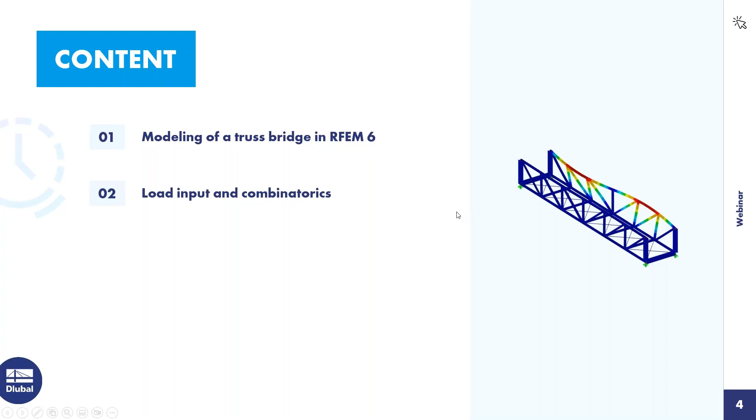The other way is to watch the entire webinar and then email your questions to info@dlubal.com. For the agenda today, Oliver starts with the modeling of that truss bridge. Then he will input loads and do the combinatorics. Then follows the determination of buckling lengths with an eigenvalue analysis using the structure stability add-on. And then the last point is the design according to Eurocode 3 with the steel design add-on.

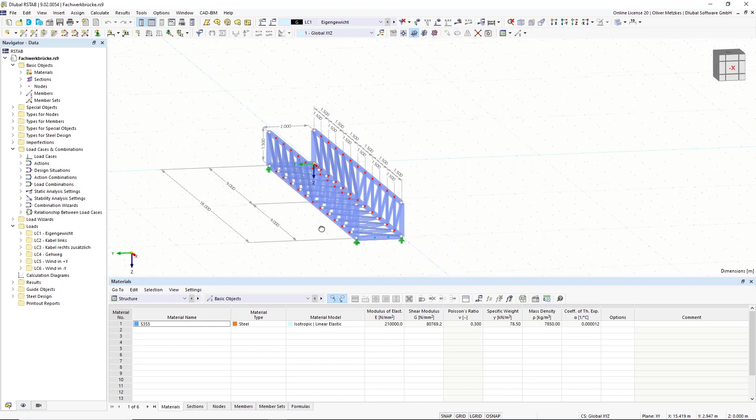Okay, sorry. I shortly want to show the structure that we want to model and analyze today. It's a truss bridge, used for example in industrial structures for cables, pipes, or also for walkways. The interesting topic here is the determination of the buckling length of the top chord, because there's no lateral connection at the top. So we want to analyze this using the structural stability add-on.

Okay, so we want to start with a new file. Let's create a new one using the symbol for the new model, and call it truss bridge. I want to directly also activate the add-ons that we want to use, which we can find here in the add-ons tab. As I've said, we want to use the structure stability add-on and also the steel design add-on.

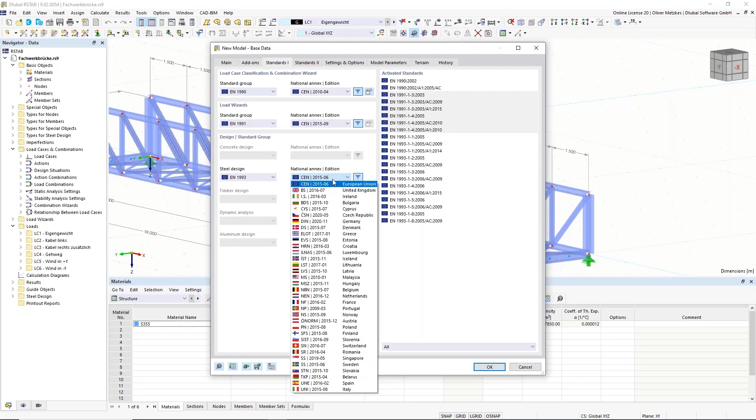Also, the next tab is interesting because we can directly define the standards that we want to use. So we want to use steel design according to Eurocode 3 today, so Eurocode 3 needs to be activated here. Then we can also choose the national annex, which is later important for partial safety factors and other values in the design. For now, I want to use the European recommendation for this webinar today.

Okay, I have set my add-ons and also my standards, and then I can begin with the structure. At first, I want to start by defining all the materials and all the sections that I want to use. I could also do it during modeling, but today I want to show how we can first define all the sections and use them later in the modeling.

So I want to start with a very empty file, so I will delete all the materials and sections that have been created automatically, just by right-clicking on the entry in the data navigator and deleting all the materials and all the sections. If we now want to start creating sections, we can do so by right-clicking on sections and on new section, and then this new section dialog opens.

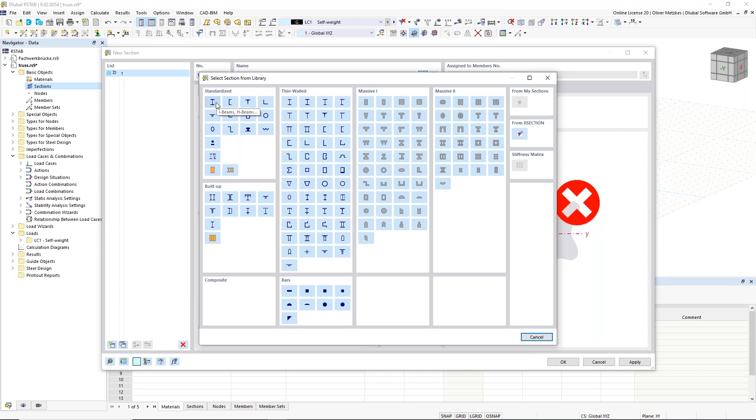There we have in the title the option to use the section library to import our sections. I click on that symbol, and we see in the section library lots of shapes and different types: standardized sections, thin wall sections, and also some shapes for massive sections. Today we want to use standardized sections. The top chord, for example, and also the bottom chord should be HEB sections, so I will first go to this I-section button here.

In the list, we can see all the possible I sections from different standards, including American and European standards. At first it's a very huge list, but to find your section, you can use this filter function. For example, for the region, we can input European Union, and now the list is shorter.

Now it's easier to find the corresponding section that we want to use. For example, here the HEB section, and it should be HEB 140 in our example.

Then we also have to choose a material. It's on the right lower corner, create a new material, and also here we have this button for the material library. It works a bit similar to the section library. By default, if there's no filter active, I will deactivate this one. Then you also have this huge list with all material types, steel, timber, and so on. But by using the filters, for example, for region or material type, you can easily find the material you are looking for.

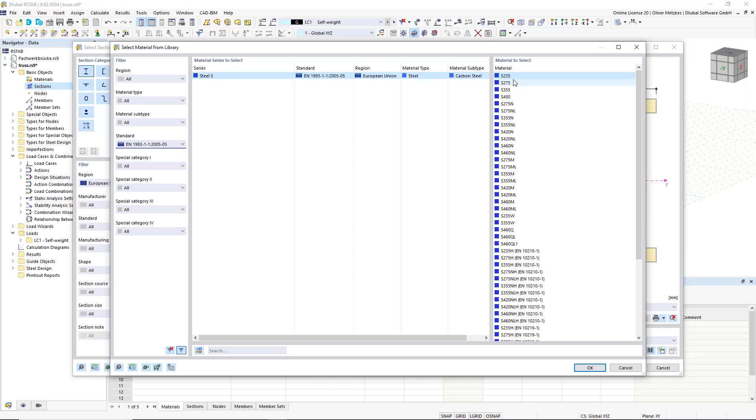In my case, I want the steel material, and I know it's defined in Eurocode 3. So I can directly go here in the list for EN 1993 and find my steel material. I want to use the steel S355, so I can select it here.

By clicking OK, this section is created. So I have my first section, HEB 140, and I can easily find it later. I can also add a comment, so let's say that is the section I want to use for the chords of my truss bridge.

The next section I want to create is now for the verticals, the vertical members. I can go again into the section library, and it should now be an HEA section. So let's go again to the I sections. And if I want to avoid always having to open this list, now I want to have those sections here.

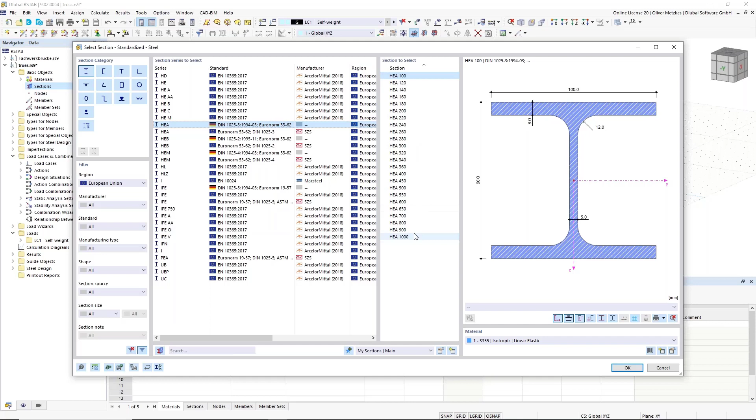I can also add them to my favorites. For example, if I often have to use HEB, HEA, IPE sections, I can add them to my favorite list so that I don't have to use this big section library every time. So I select all those sections by pressing Shift, and with this button I can add them to the favorites, my sections.

I will click this, and now I can also use this library, but by clicking on My Sections, I'm directly in those sections that I have saved here. So I can easily choose now this HEA section here, and that would be the section for my verticals.

I want to create a new section, but it would be the same one, so I just copy it here by clicking this copy button. Now for diagonals.

The next section I want to create is for my cross beams. I create a new one, and now instead of going into the section library or my sections, I can also directly type in the section name. If I type in a section name that is recognized in the database, it will automatically create the section. For example, now I want to use an IPE 100, so I can directly enter IPE 100 and it will choose the first corresponding shape.

So now I have created this IPE 100 for the cross beams, and I can also add a comment here. I would need two more sections: one now for my tension members, which would be an L shape. So I will go into the angles and look for a corresponding one. I want a small one, so let's just use this section here.

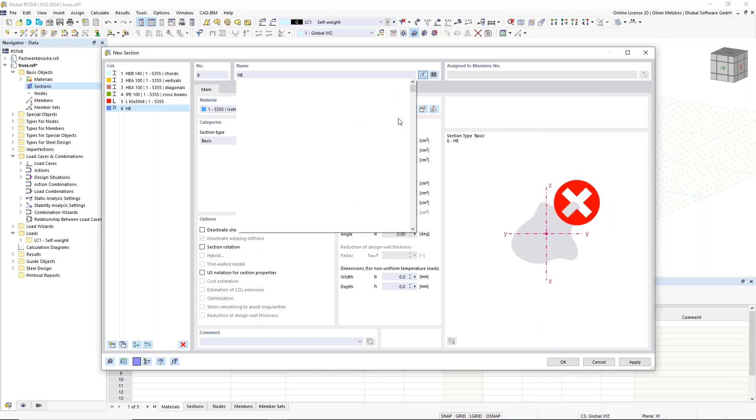The last section we want to create is for the end frames. We will have end frames at the beginning and the end of the structure, and now we want to use HEB 200 sections. So I directly type them in, and it's automatically recognized, and we have created this section. I just add the comment for the end frames.

Good, so now we have created materials and sections using the section library or direct input. So now we have all our sections and we can begin with the modeling.

The first thing we want to look at is the definition of the grid in the background, because we can use these points also for modeling. As we know, the structure we want to model has a span of 18 meters, with the middle at 9 meters, and verticals every 1.5 meters. So it would be good to have our grid in the background also with a distance of 1.5 meters, and a line, for example, after 9 meters. So we can also define that.

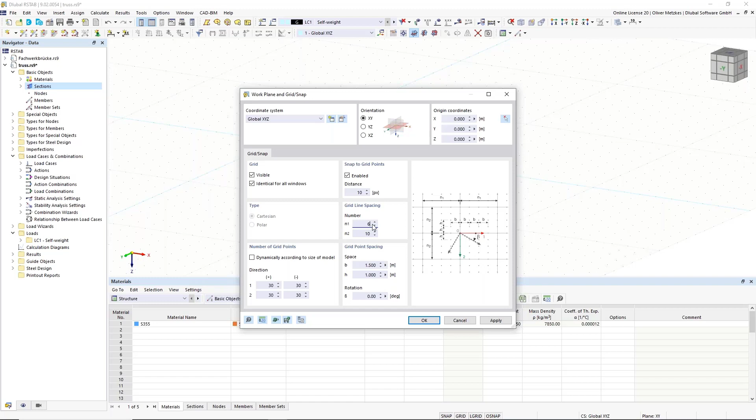I will go back to the model we are creating, and we can use this symbol here for the definition and settings of the line grid and the work plane. This is called the work plane with all the grid points, and here we can also define the distances between the grid points. As I said, we want to use 1.5 meters and we want a grid line every 6 points, so that would be in the middle after 9 meters, and also at the end.

Okay, now it's automatically adapted and we can use those points for modeling. So to create the first chord, we go here on this button, new single member, and here we can choose the member type. It would be a beam member type, and also the section - automatically the first section of the list is chosen, so that's okay for the chords: HEB 140. We simply click OK, and then we can model it graphically.

So we start here at point 0, and then we use this grid point here after 2 lines, and we see already at the cursor the info says it's 18 meters - exactly the length we want to have. I click here again, and now we have already modeled our first chord member.

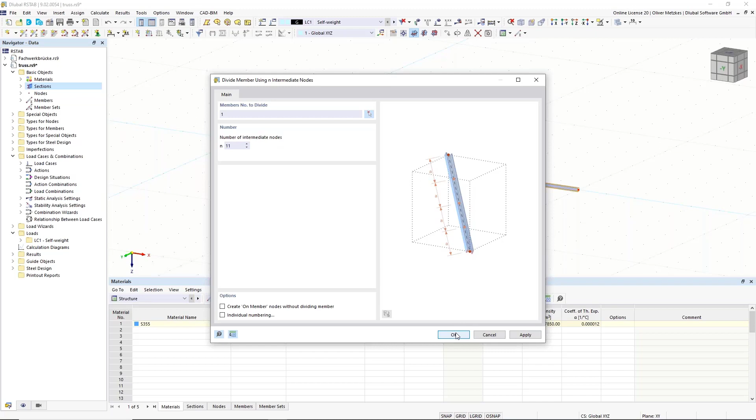Now I want to also have these vertical members. For that, I can use the division function for this member. I right click on the member, then go into divide member and n intermediate nodes. In this case, I want to have 12 sections, so I would need 11 intermediate nodes. I put in 11 nodes and click OK, and now those 11 nodes are created, every 1.5 meters. We can also hover over the members, and the info tells us the length is exactly 1.5 meters.

Now that I have created these division nodes, I can use the copy function to create the second chord member and also all the vertical beams. I will select all those members and then use the copy function - you can find it here, the move/copy function. I click on this button, and we want to create a copy of this member in the negative Z direction, 1.5 meters.

If we go now under the options tab, we can use the function of step links. If you click on that, it means automatically all the nodes created are now linked with a member, and for that member we can choose a template. I will create a new member template - it should not be a beam member, but truss members for the verticals and diagonals. The truss member type means automatically at the beginning and end of the member a hinge is created, so bending moments are not transmitted at the member ends. That's basically what I want for truss members - the general assumption that I have hinges at all the nodes. So I use the truss member type here, and as a section I use the section for the vertical members.

I say OK, and now if I also confirm this move/copy function, my chord member is copied 1.5 meters, and in between, all the vertical members are also automatically created.

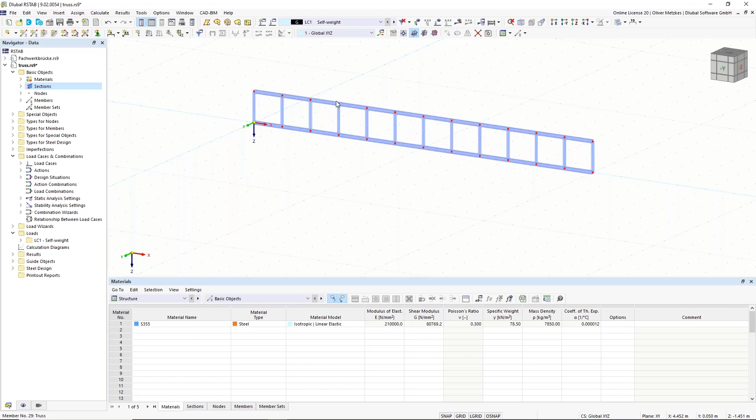Now I would also need the diagonal members, and I want to create them so that they mostly get tension - starting at the upper point and going to the right lower point. I create a new member using this new member function. Again it should be a truss member, so I select the truss member type, and as a section I use the section for the diagonals.

Okay, and now I can click at the two nodes to create this member. So now, for example, I could also use again those move copy functions here to create the other members, or another method would be to use the drag and drop function.

So I can simply pick this member and move it around by holding my left mouse button. And if I press the control key, additionally, you see there's a little plus symbol. And if I then go to the next node and release the mouse button, then it's automatically copied. And I can do that not only with one member, but also with multiple members.

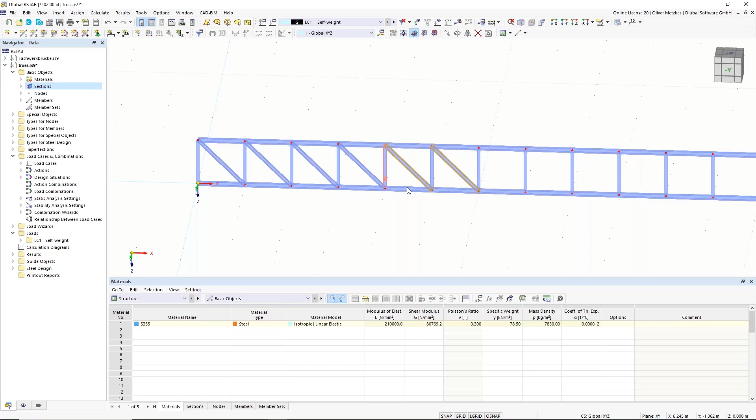So I can also copy those two members. And if I copy them again, I've already modeled half of the diagonals. So now, as the half structure is done, I can also select all those diagonals and just mirror them to the other side.

So I use the mirror function here at the top, this button, and I want to create a copy, and I have to specify the mirroring plane. It would be the YZ plane, and the middle point would be one point here in the middle. Okay, I confirm it, and then all the other diagonals are created.

Okay, good. So already I have half of my structure here. And now I want to copy it again to have the second half, and I will do it again by using drag and drop, because I know that the grid points in this direction are spaced every 1 meter.

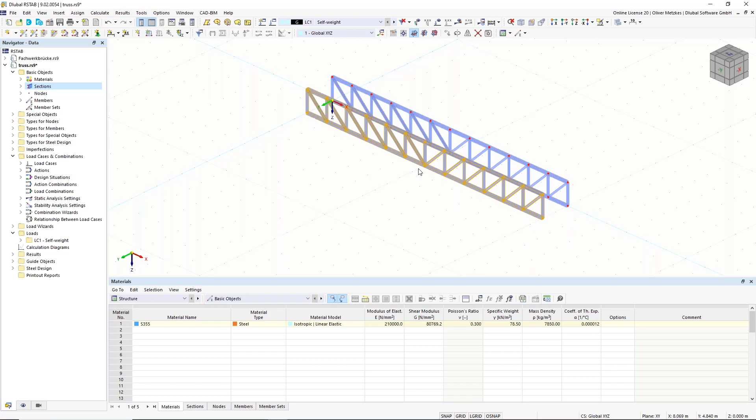So as I want to have 2 meters of width, I can simply pick it again, use the second grid point here, and pressing Control key, then I can release it and it's copied again.

Okay, so now I have my two truss girders here, and I need now the modeling of the cross beams in between. So I will again choose this function for creating a new member.

I will leave the member type as beam, but for the cross beams, I also want to use member hinges at start and end. So the other way of using truss members, for example, would be to use beam members, but using member hinges. I want to shortly show how that works.

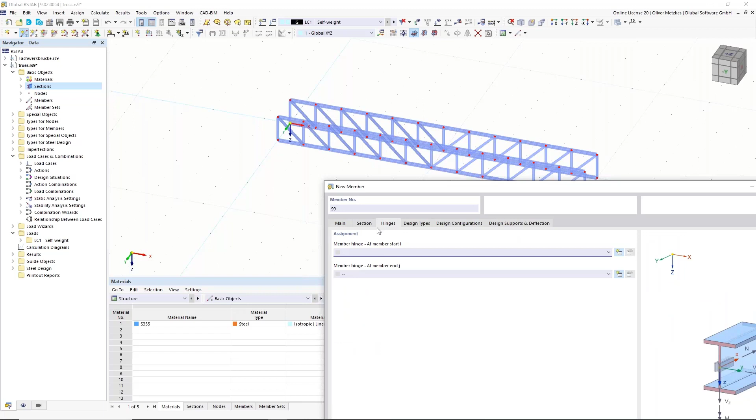So I have to activate the hinges function, and then there's this tab for the hinges, and I can create new member hinges that I will use at the beginning and at the end of the members. So now I want to create a new one by clicking this button.

And now for the member hinges, it is like that everything that is activated, that will be released. So now it's the bending moment in Y and Z direction, so exactly what I want. So I can directly confirm this default input. And I want to have it at the member start and also at the member end.

So, okay, I have to choose the correct section, I see. So this is still the first section, but I want to have the section for the cross beams, so the IPE sections. I confirm it, and now I can model here this beam by picking the two nodes.

Okay, now I have created one, and I would have to copy it here 11 times so that I have 11 cross beams, and I can use again the copy function for that. But now saying that I don't want to have one step, but I want to have 10 steps.

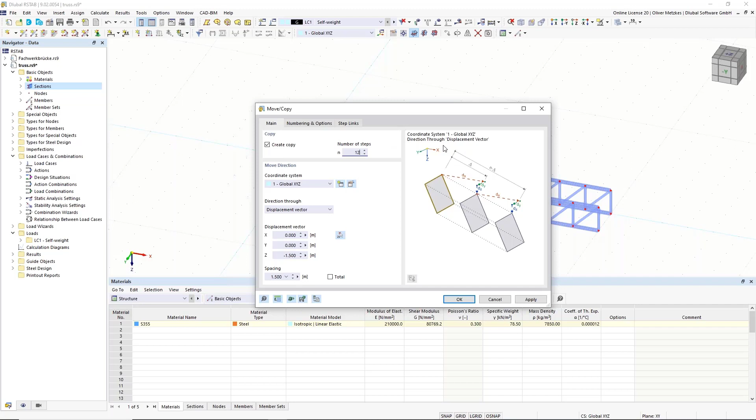10, sorry. And for the displacement vector, I could also put it in directly, so in the X direction, it would be 1.5 meters. But another option would be to use this picking function to pick the distance and the displacement vector directly from the model. I will show that.

So I use this function, and I want to say this member should be copied from here to here, so the 1.5 meters in the X direction. In the options, I will deactivate this linking function and confirm it. And then all my cross beams are created because it's copied here 10 times.

Okay, so now I also have the cross beams created. And what is missing now is here the end frame that needs to be at the beginning and the end of my truss bridge. So I want to have another member in between here. It should be a beam member without hinges. And as sections, I want to use now the section for the end frames.

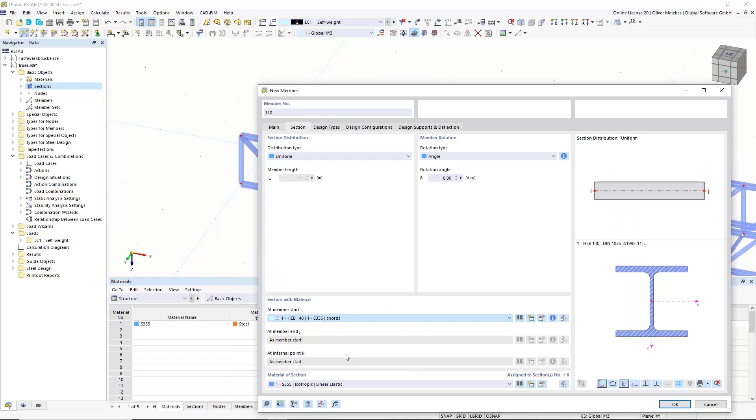Okay, so from this point to that point, we have already seen this function. Now also those two members that have been created automatically, I want to modify them, and also at the other edge, I can do it simultaneously. So I select all 4 members by pressing the Control key.

I can edit them by right-clicking and choosing Edit Members. So now I can say it's no longer a member type truss, but I want to have it as a beam, and the section should also be the one for the end frames. As I want to use the strong axis in the direction of this frame, I can choose the rotation angle to be 90 degrees. Okay, so now it's rotated and the section is changed.

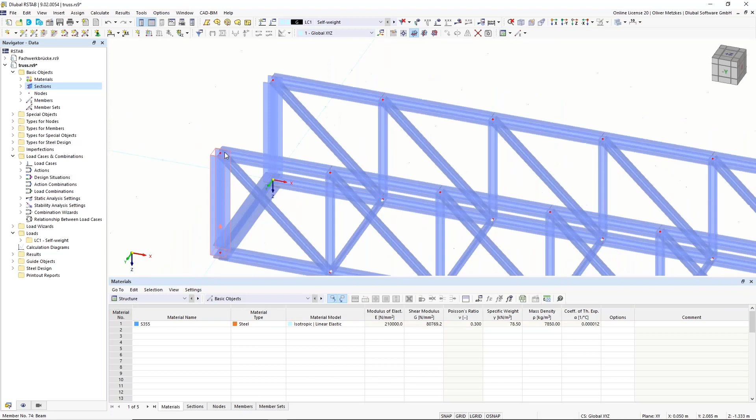I also did it here at the other side, and I simply need to copy this member again by using drag and drop in this case. Okay, so I have created all the members of the truss bridge, and I see only the tension members in between are missing.

So I also create them again using the create member function. Now I want to choose the member type tension member, so if it would get compression during the calculation, then it's removed, and the next iteration will begin without this member - it will fail in compression. That is the tension member type. I choose the section for the tension members, and I create those two members here.

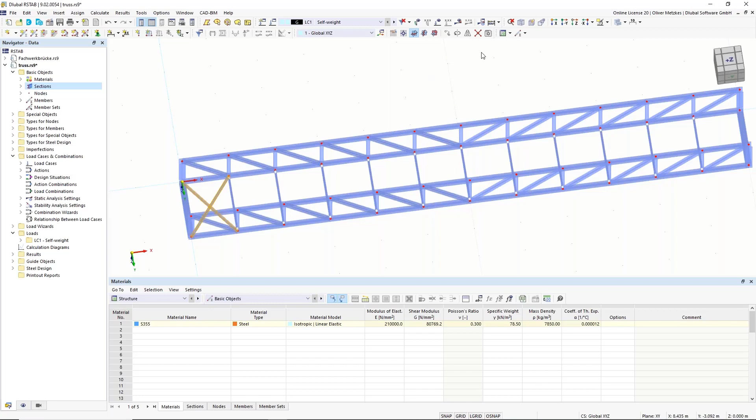And I can copy them again using the move copy function 11 times in the X direction. Oh, that was just one time. Okay, I have removed this number, so now it's 10 times, I think. Yeah, okay, so now I have also created all the tension members.

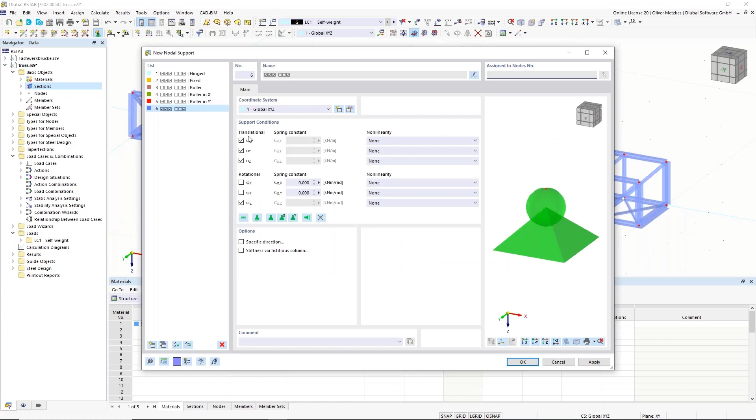Fine, so basically the structure is created. I now just need some nodal supports. So I want to create supports here at these 4 nodes, using nodal support for that. There's the button here at the top, and I will create the nodal supports type. If I create a new nodal support type, then every checkbox that is active will be supported. So for the first node here, I want to support all translational directions, X, Y, and Z direction. Okay, and I confirm this choice and click on this node, and then the nodal support will be placed.

Okay, I will create a new one for this node. So now I only want the Z and the X direction supported. So I activate that, okay, for this node.

And then for the other side, I also want to have nodal supports, so I create new ones. Now it should not be supported in the X direction, so only Z direction and Y direction. So I choose only those two - that would be the support type for this node. And the other node should be only in Z direction, so I will just create this.

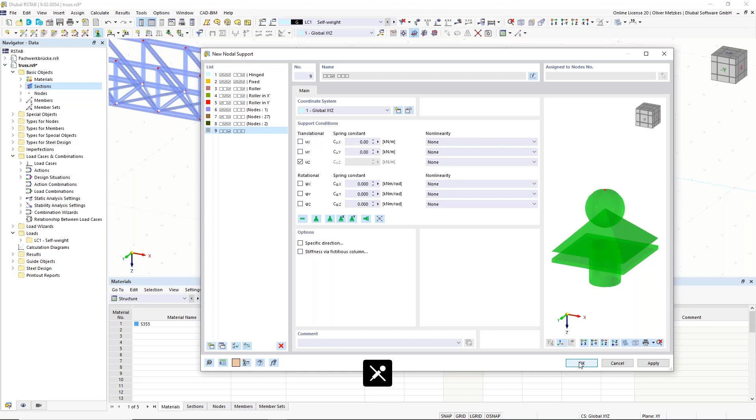Okay, so now we also have supports and the structure is modeled. So I can simply save it, for example, and it's always a good idea. If you save it the first time, then you also have to specify where you want to save it. So I just save it here in my default folder. Okay, and then when the structure is saved, we don't have this little star here anymore, because that star tells you that something has been modified after saving.

Okay, now we have modeled our structure and we want to begin by creating the load cases and also the loads. If you want to go into the load case menu, you can do so here by clicking this button, that would edit one load case, and you are in this dialog for load cases and combinations.

Automatically, the first load case has been created, so it's the self-weight load case, and the self-weight of all the members is automatically taken into account by using the self-weight factor. So in the positive Z direction, as it goes downwards, you have this factor of 1.0, so the self-weight is considered within this load case number 1.

I also want to create other load cases. So in my example, I first want to create all the load cases, create all the combinations, and later I want to also insert the loadings. So first we want to go through this dialog and create all load cases and combinations.

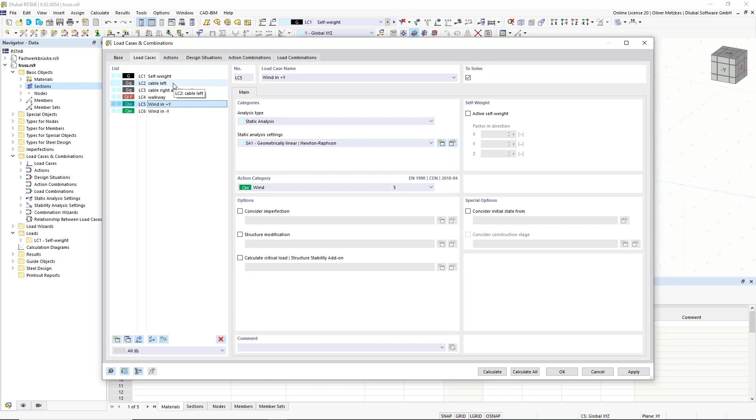I don't have temperature loads, to simplify things a bit, but in my structure, as I have modeled the supports this way, a temperature load would just increase the length, but there would be no internal force from that if I have this uniform temperature load, for example. So for now, I'd say it's okay to have this simple structure of load cases.

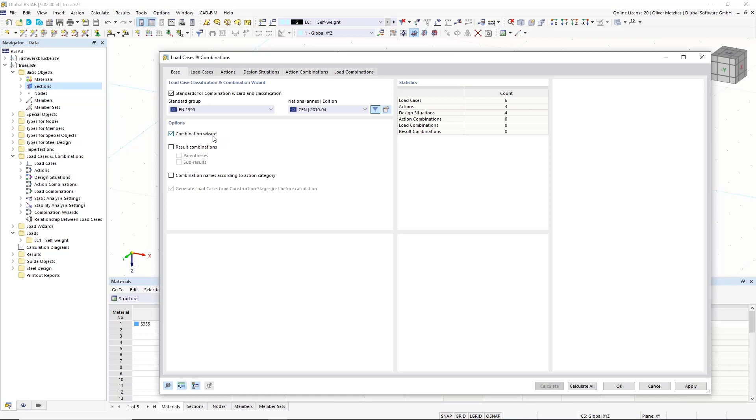We now want to perform the combinatorics by using this combination wizard. If you go into the base tab, you see I have the combination wizard active, which means I can create all the load combinations automatically.

If we want to do so, we can look at this actions tab, which now lists all our actions, and we can choose whether the load cases within one action category are acting simultaneously, or could act simultaneously, or are, for example, alternative.

For all the others we only have a few load cases. For this action category 2, we've said the two cable loads can also act simultaneously. But for the wind loads, as I have positive Y direction and negative Y direction, it would be an alternative loading, so I can choose that here.

What I can't choose here is that the load cases also have dependencies between the action categories. I wanted to say that the walkway can only be there if I don't have the cable loading at the right side, for example. That I can input in the next tab, the design situations.

In this list I now have all the different design situations I could analyze, and design situations are defined by the design situation type. As you can see, the first design situation for the ULS design also includes the formula using partial safety factors and combination values. You can see the combination rule if you click this little info button, and then you see what's inside this design situation type.

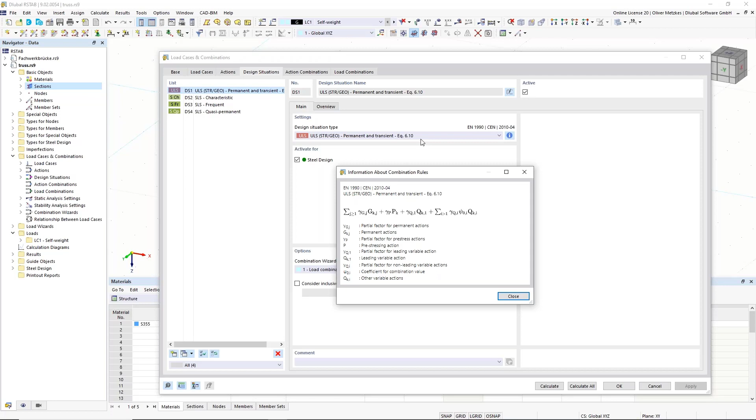In this example I only need ULS and SLS characteristics, so I can simply delete the other two types that were created automatically, and I will delete them. For the first design situation type, I now want to say that I have dependencies between the load cases, which can be done using this function for considering inclusive or exclusive load cases.

If I create a new relationship between the load cases, I can say, okay, my cable load on the right side, which I select here, can only be there if I already have cables on the left side, so only combine it with load case number 2. There shouldn't be a case where I have only load case 3, for example.

That was one of the dependencies I mentioned before that I want to apply in the structure. In the exclusive load cases, I can then say I should never combine the walkway load, load case number 4, with the cable load on the right side, because I've said they cannot act together — if there are cables, you can't walk, and if you're walking, there are no cables.

So that is the dependency that I want to put in here. That can be done by using this relationship between the load cases. So I have created this dependency, and now the other rules for combination are specified in the combination wizard here.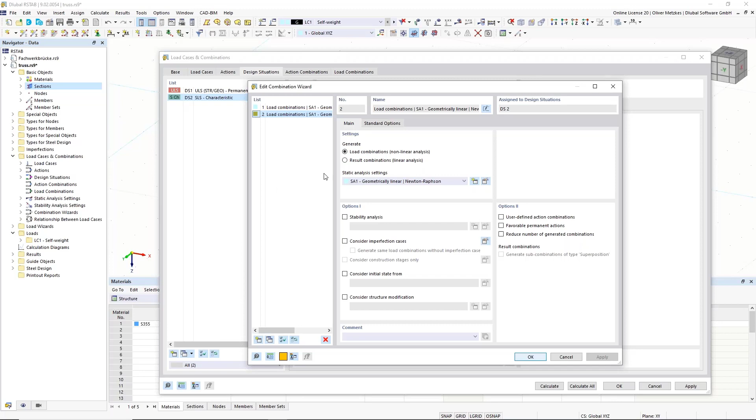For the SLS design situation, I use another combination wizard. I create a new one here, and in this one, I don't choose the stability analysis option because I only need it for my ULS configuration and not for the SLS design. So first order without stability analysis here. And I also want to consider these rules between the load cases, so I also activate this option here.

I can now click on the next tab, the action combinations, where I see all the different combinations between the actions, and resulting from that list the load combinations are created. If I click on the next tab, I see I have 19 possible combinations of loadings with the partial safety factors and combination values. For all those load combinations, the calculate critical load option is also active because I chose it in the combination wizard. For now, all those combinations are empty because I haven't defined the loadings.

So I will just go into my load case, and I will start with load case number 2. Now I want to define those cable loads. For that, I want to use the load wizard, specifically the member loads from area loads wizard.

For that I need some help nodes in my structure, because on the left side I only have this cable loading, and I use the member division function to create a new node on this member, defining the left side of my bridge. So I right click on those two members and use the divide member function, now with a distance, and I want to say from the member end, divide it at 40% of the member length.

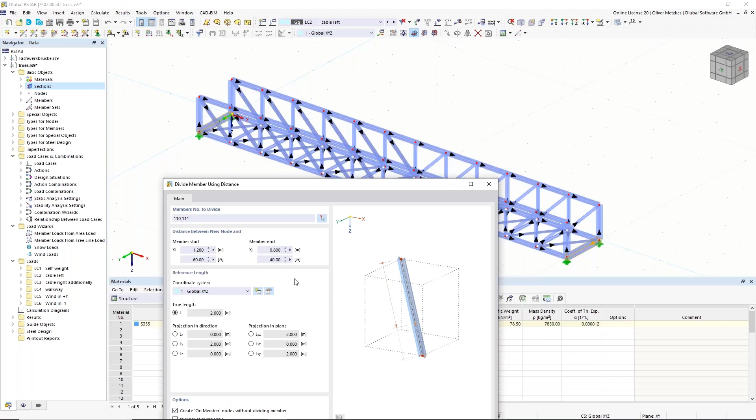I also want to activate this option, create on-member nodes without dividing the member, because I want to still consider this member as one member later for the design. It's only a help node that I want to place here, so I use this create on-member nodes function. Now the left side for the cables is specified by this node at 40%.

Now I can use this member load wizard, member loads from area loads. I right click on it and create a new load wizard, and in my example I want 1.5 kilonewton per square meter in the Z direction. For the geometry, I can select those nodes that I created, using this picking function to select the corner nodes of my surface load: this one, the help node, the other one, and that node. So I want to place a surface load on this plane.

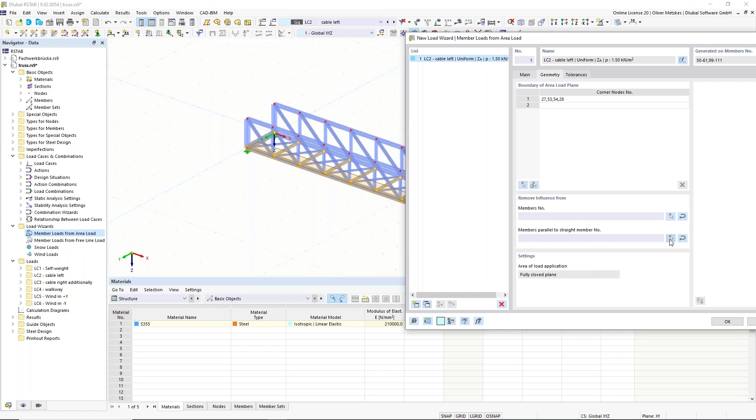In the background, you already see selected all the members that will be loaded. I see the load will be distributed to the cross beams, but also to the chords, and I want to remove the load from the chords - it should all be on the cross beams. So I use this function and select all members that are parallel to one of the chord members, and now we see only the cross beams will be loaded.

I confirm it, and now we see this load as a surface load, which we can also display separately. If we right click on it, we have this function display separately, and we see that from the surface load, automatically these member loads are created on the cross beams. We can again right click on it to see it as a surface load. That would be the load case for the cable load on the left side.

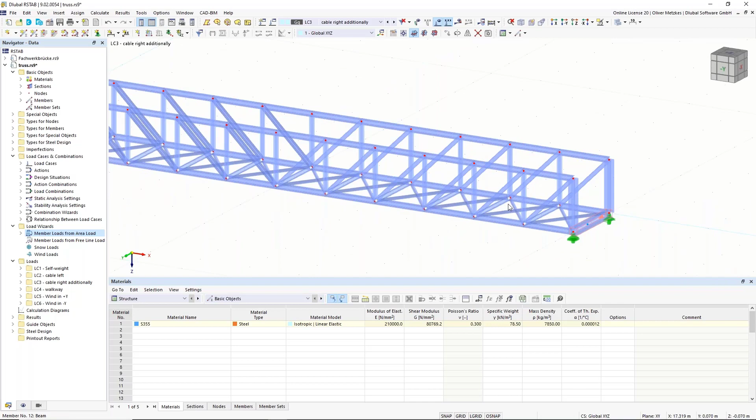For the right side, I want to use a different load wizard, but again with help nodes. So I will again divide those members: right click on it, divide member by a distance, and now it should be in the middle, 50% from the start, as on-member nodes.

Okay, now I want to show you another load wizard: the member loads from a free line load. So I want to assume there's a line load, and from that I want to create the member loads. For the cables on the right side, I create this new load wizard here.

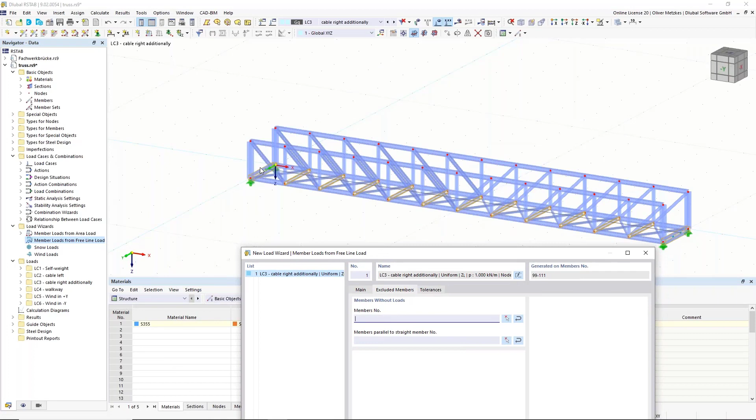Let's say we have 1 kilonewton per meter, and it should go from node to node. So I use this button here to select the 2 nodes - it should be this one and that one. Now we don't need to exclude any members, as only the cross beams will be loaded, so it would be okay now.

I confirm it directly, and you see I have placed this line load here. As it was for the surface loads, I can also right click on it and display it separately, and you see those point loads will be created from this load wizard. So it's just another load wizard that you can use.

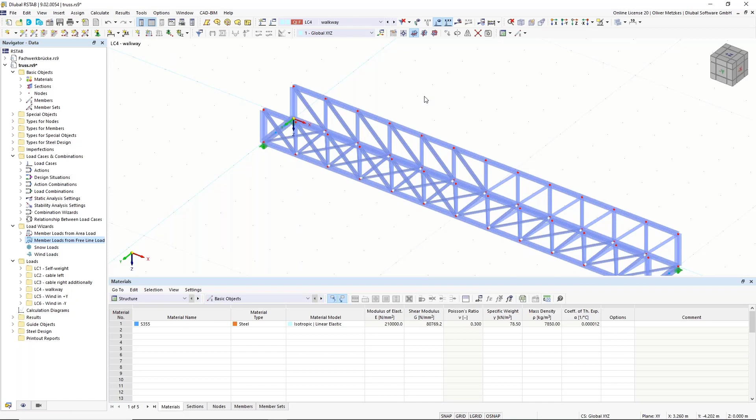I use it now for the cable load on the right side. For the walkway load, I will use again the member loads from area load, so I can create a new one. Now I want to have 3 kilonewton per square meter, and again I want to pick the nodes here - now the other side.

I click on all the nodes. Oh, I see I've not picked this one. Okay, now I have them. And remove the influence again from all the members that are parallel to this one.

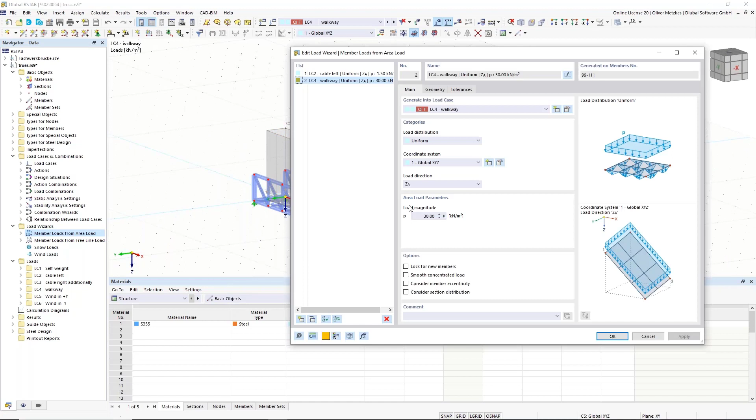Okay, I have here my surface load. Oh, it's 30 - I added it again because I wanted to have 3. Yeah, that is better. And I could also display it separately to check the load.

So now the missing load cases are the wind load cases. For the wind load here, I also want to use this member loads from area loads function. But as I have a structure with openings, I would also calculate the wind load value by using a fullness coefficient.

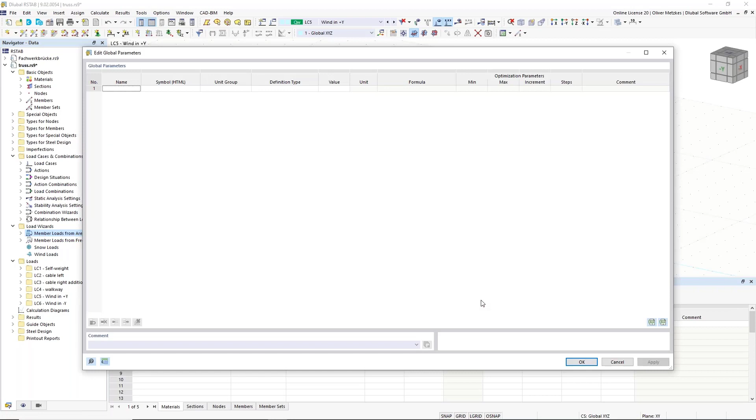So at first I will use the parameter function here. In the table for the structure, you have also this button to edit the global parameters, and then you can define parameters that you use in your model. Also for parameterization, for example of the height or the width, it would be possible. Now I only want to use it for the calculation of the wind load.

So let's say we have a wind pressure here, and we simply insert it here - it would be a load. So we have it here as a surface load, this 1 kilonewton per square meter. And for the wind zone that I'm in, I have here 0.4. I would also have to consider a force coefficient.

Because I have the section shapes here and a truss beam, that would be a coefficient. So I have it as - let's just use this partial factor because it would be the same from the units. Let's say it's 2 in this case, and the fullness coefficient, so we have phi. I will use again this partial factor type. Okay, and now let's say we have a fullness coefficient of 0.2.

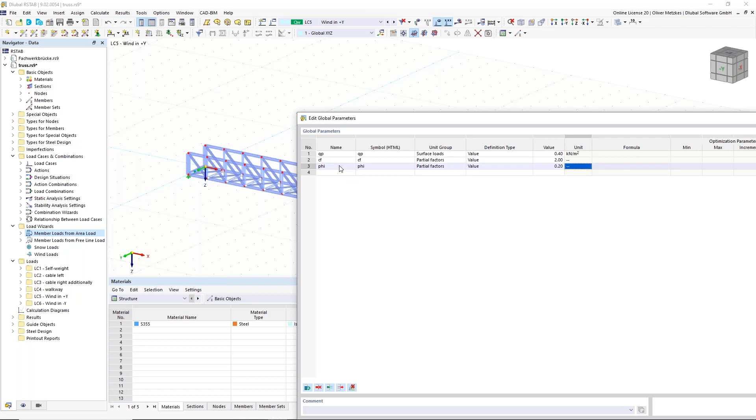Now, as we have defined all those values here in the global parameters dialog, we can also use them later in our model. So I've defined my parameters here. I confirm it, and now I can create the new load wizard.

So for the area loading, it would be now in the y direction, and the load magnitude I can calculate using the parameters. I click on this small button here on the right side and choose the edit formula option. Now I can say it would be QP times force coefficient times fullness coefficient. So that would be my value that I want to place on the surface, and it will also be distributed on each member.

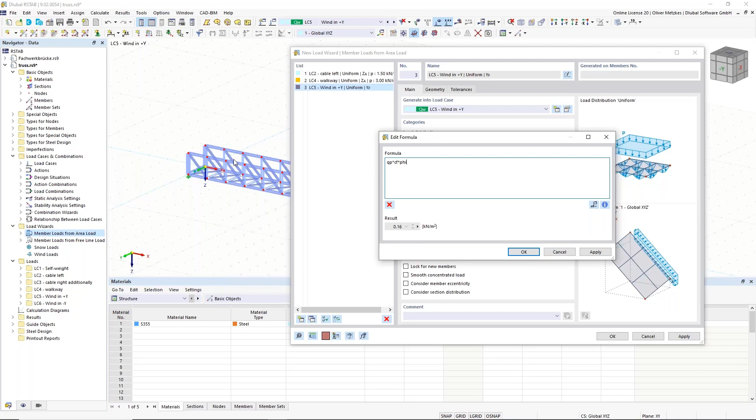Okay, so I use that here, and the geometry would now be this side. So I choose here the corner nodes, and I also say I have a second load plane on the other side. I don't want to consider the shading for simplifying the model, I just want to place the same loading on both sides. And I can confirm it.

So I want to have here my wind load on both sides, and I also want to have it in the next load case but in the opposite direction. So I can, for example, also copy the loading by going into the load case dialog and using this button at the bottom to add the loads from an existing load case to another one.

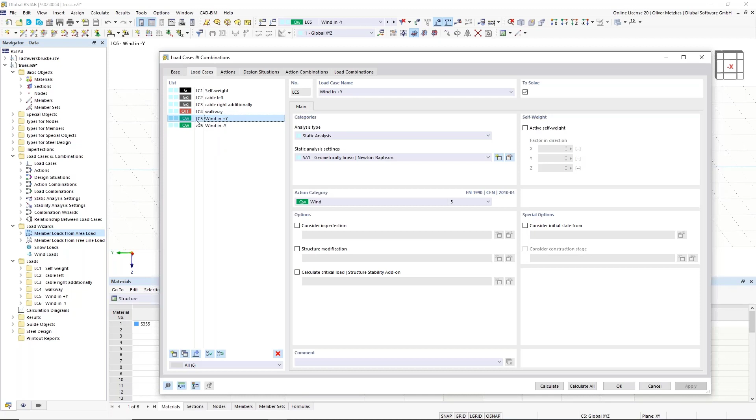So I go to load case number 5, use this button, and I want to copy the loads into the existing load case number 6. And now in load case number 6, I also have this loading, and I want to have it in the opposite direction. So I go inside and add the formula again by adding a minus. Okay, and now it's in the opposite direction.

Good, so now we have all our loadings inside, and all the combinations will already have the correct loading inside. And now we could, for example, calculate our design situation number 1, which includes all the results from all the load combinations.

As I have selected the stability analysis option, it performs first static analysis and then also stability analysis by using the internal forces from the static analysis as a basis. Okay, so now I have my results, and in this design situation number 1, there are all the results included.

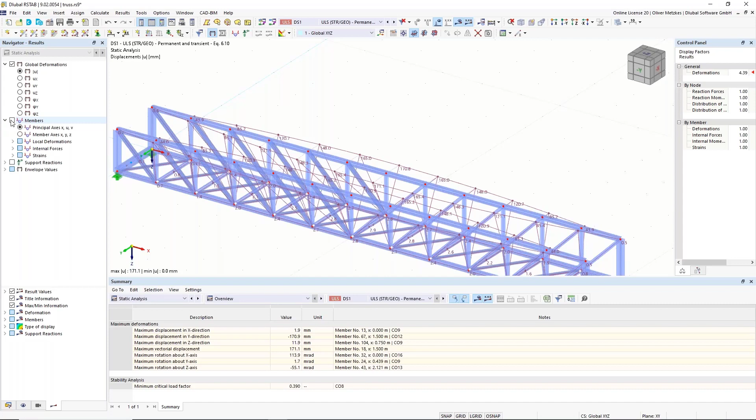So I can show max and min values. For example, if I go into this result navigator for the members, I can show internal forces, so normal force, and it would show max and min values here. To have it a bit more clear in the view, I don't want to show all the beams, but maybe just the chords.

So I can use visibility options. I select here my two top chords, for example, and then use this button to create a new visibility by the selected objects. Now I can see I only have these two chords in the view.

So I see, as here are max and min values, I will always have compression in these chords, well, as expected, as it's a simple beam as basic structure. So I have compression in the top chord, tension in the lower chord. Then I would also have tension in diagonals and compression in the verticals.

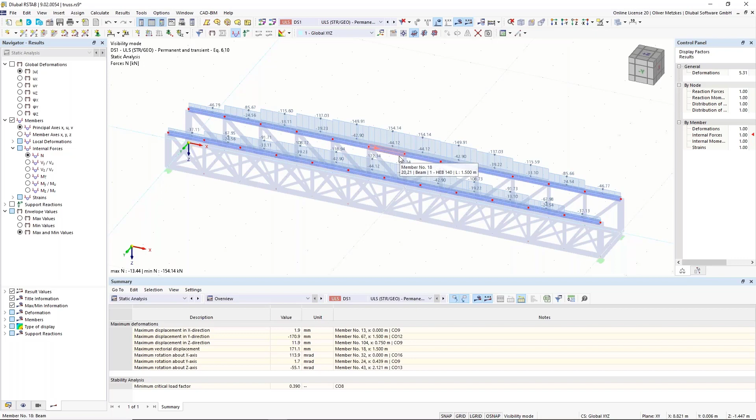The highest compression force here is 150 kilonewton, and it's a varying compression force, lower at the end and higher in the middle. Well, basically as I expected. And like that, I could also show all the different results, also deformations, for example. So that is this result navigator function here.

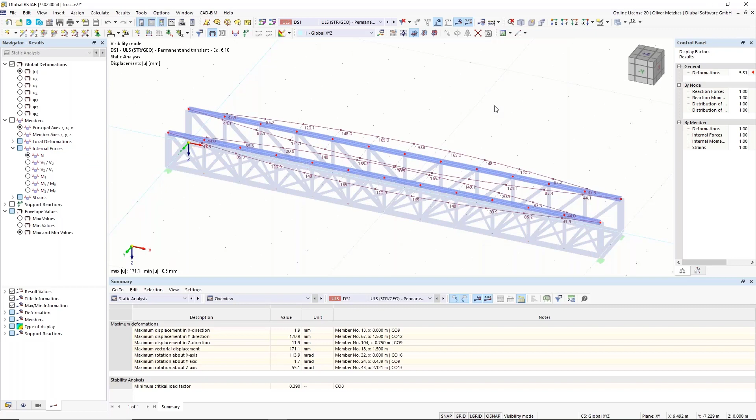Okay, so now we have created the combinations, we have modeled the structure, and the next point we want to look at is the determination of the buckling length, because that's the interesting point here. For my top girder, as I don't have lateral restraints, I'm interested in the buckling length of this top girder.

So we have now performed stability analysis for every load combination in design situation number 1. As a summary result, we also get in the summary table the minimum critical load factor from the stability analysis, and now we see it's 0.4 in combination 8. So now we can also have a look at combination 8.

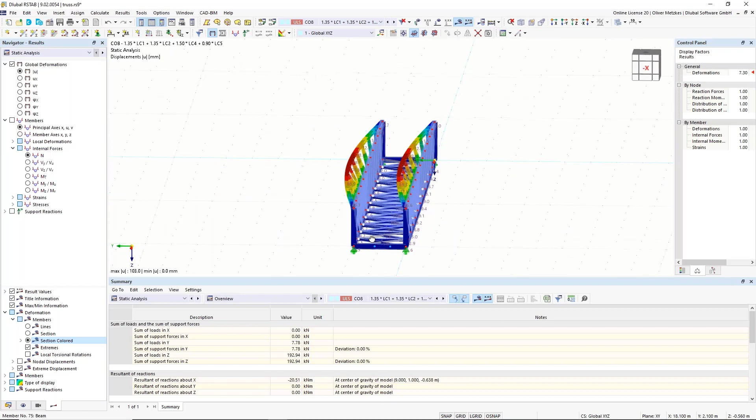So I selected here in the list combination 8, and that would be the mode shape. We can display everything again, but to see it a bit better, we can also change the display option for the deformation. So in the result navigator for deformations, I change it from members to colored sections.

Okay, so now we see the governing mode shape would be this buckling shape of the top chords. We have said we have no lateral restraint here, we have assumed all those vertical and diagonal members with hinges at the ends, so basically I don't have any restraints in the middle. So it would be this one wave buckling shape for these members.

And as I see, we are at a factor of 0.4 approximately. So that would mean that with the given loading and the modeling we have chosen, the structure would be unstable. If, for example, we would calculate it using second order analysis, we would get a message that it's unstable because the critical load factor was lower than 1. So in the current state, we can't design the structure.

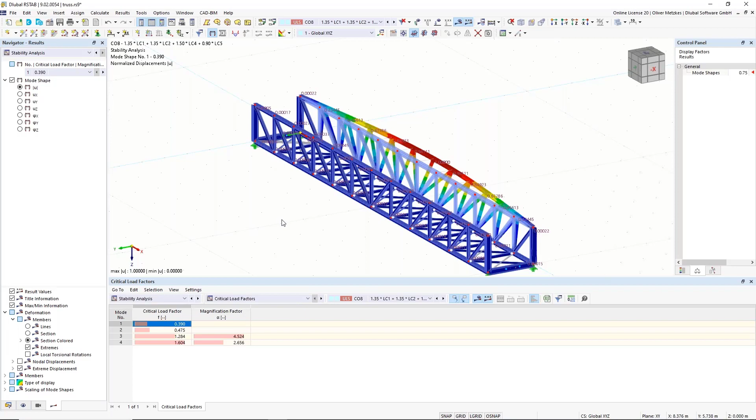That would not be sufficient, but we can now think of ways how we can enlarge the load factor and also the buckling resistance of this member. So what would definitely be good in this case would be to create another frame, just like the end frame, here in the middle of the structure.

In my example, I want to create in this middle here another frame that can hold this top chord. So for that, I want to choose the member type of those two vertical members. I select them, right click on them, edit members, and it should now be a beam member type. I also want to rotate the section about 90 degrees to use the strong axis bending moment for that. Okay, I confirm it.

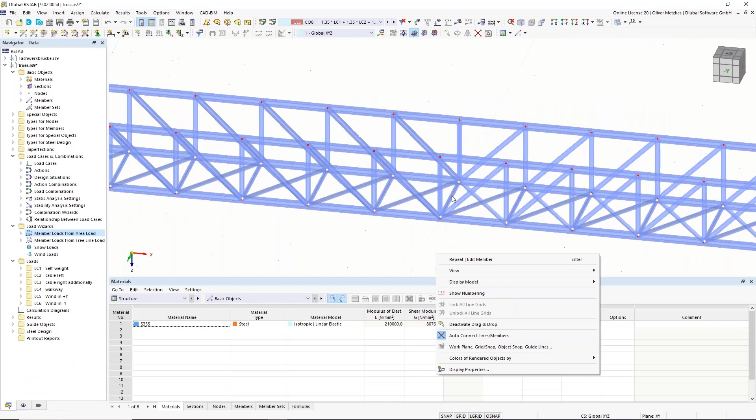Also for this cross beam, in this case, I need to remove the hinges because I want to have this frame to be developed here in the middle. So I remove also the hinges, and now I see that I have also forgotten to place hinges at the beginning and the end of my chords.

That was the intention, because I also want to assume that they are hinged at the beginning and the end. So I will simply add the hinges again. I select those members, create the hinges again at the member start. I have forgotten it during modeling, but I can easily add them now. So I select those members, and now it would be at the end. I go on hinges again and place the member hinge at the member end.

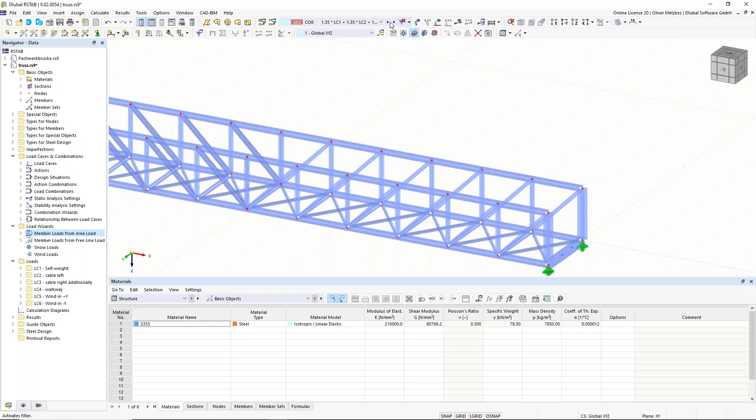So I have the hinges here, but the important change now was the insertion of this frame in the middle. If we now look again at this combination 8, or we can calculate design situation number 1 again, then you see it again, static analysis for all those 19 combinations and also stability analysis for all the combinations. And now we see the result.

Now the governing load combination would be combination number 9, but the minimum critical load factor is now 1.2. So if you now look at combination number 9, and here we can switch to stability analysis, then we see that just because of creating this frame in the middle, it is stiff enough that we now don't have this one wave buckling shape, but now the top chord is forced to create this 2-wave buckling shape. That is already good, and so now we are at a critical load factor of 1.2.

So now it would be also stable, for example, if you calculate it according to second order theory, and that was already this change of creating the frame here in the middle.

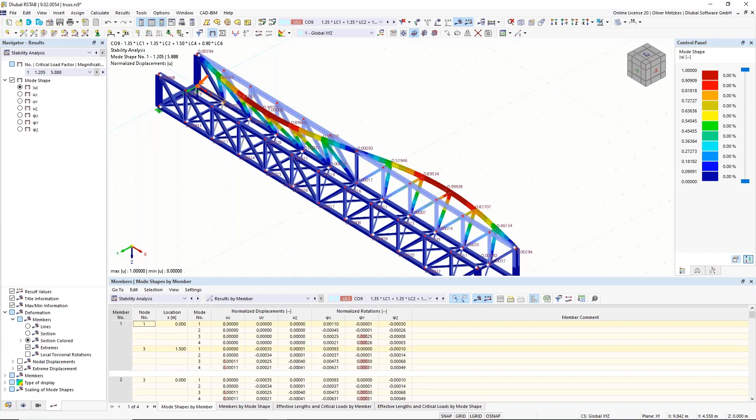Now, the structure stability add-on is not only able to calculate critical load factors, but we can also calculate buckling lengths. So in the result table, we can, for example, choose the results by members. I want to use a visibility filter again to narrow down the results. So I select again all the top chord members that we are interested in now, and use this visibility by selected objects function.

And we can have a look now, not into the mode shapes tab, but into the table for effective lengths and critical loads by mode shape. So for mode shape number 1, we get now effective lengths and critical loads for all the members that we have here. The first thing that we can see is that for the results, we always get 2 effective length values, so L critical U and L critical V.

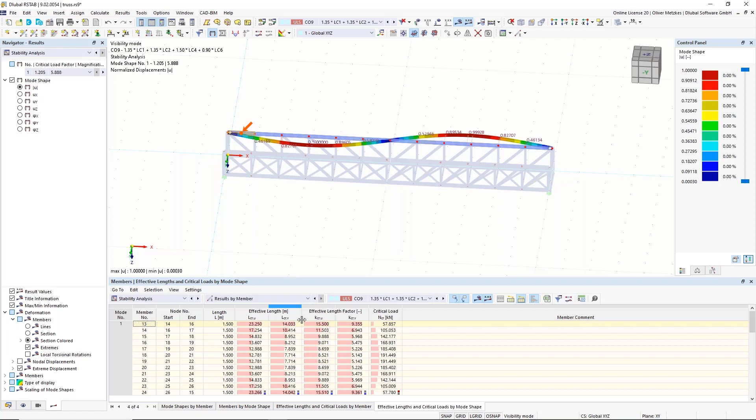Basically, that always means that it's flexural buckling about this axis, so about the U axis or about the V axis, and U and V are the principal axes of the structure of the section. So for doubly symmetric cross sections, they are identical to the Y and Z axis. We can also show this axis, for example, in the graphic.

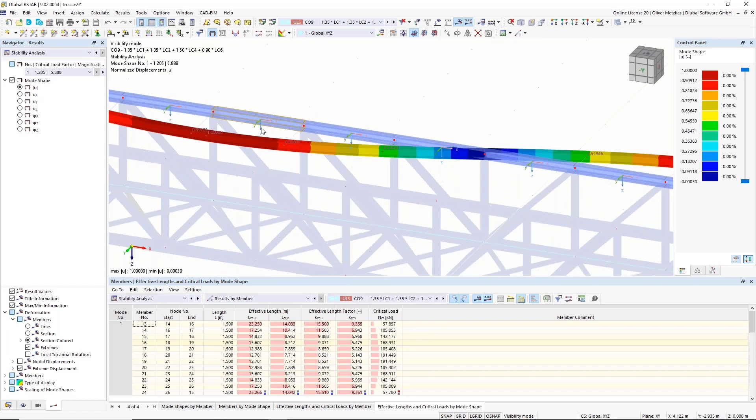If you right click on the members, we can activate the local axis system. The direction that we are now interested in is the buckling around the z-axis. So that is the direction we want to look at, and the other values we can't use. Basically now we can only use one of those values because it's flexural buckling around the z-axis. And if you are not sure which of those you have to look at, if you have, for example, unsymmetrical cross sections, then you can simply look at it. So in the sections, we can have a look at the L section.

Then we see, okay, the U-axis belongs to the Y, and V would be equivalent to the Z-axis. So if we have a doubly symmetric cross section, for example, it's not shown like this. Now we want to look at this L critical V, because that's the result we're interested in for this buckling shape. So that's the first point - we need to look at this value and not at this value.

The second point is that we get different effective lengths for every member here. That's because of the varying compression force in the top chord - we don't have a constant compression force in this case. If you had a constant compression force, we would get the same effective length for all the members, and probably this effective length would also be 9 meters, because it's the length of one of these - the half length of the whole length. So to the middle we have 9 meters, and as we have the buckling length here at this distance, it would also be 9 meters.

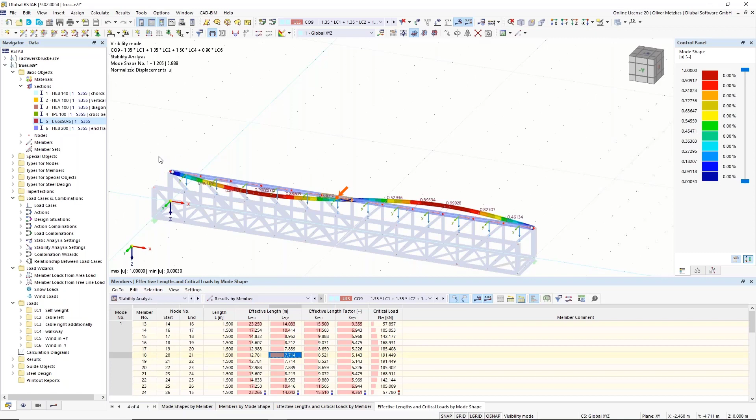In the results later, I will shortly show some pictures - there's not a big difference. That would be the result if I use the same buckling length for all the members, so now it's the length from this middle member, the 7.7 meters. If I use always the corresponding buckling length, then it would be a smoother distribution.

So now I am a bit on the unsafe side for the outer beams, but as the most governing design check is in the middle, and I use the same cross section for the whole member, which is also the basis for the equivalent member method, it is okay in my case to just use this effective length from the member with the highest compression force. Okay, so now I use it here. I close these images.

Now I want to show how we can define the buckling lengths in the steel design add-on. So we have here these types for steel design, and there are effective lengths, boundary conditions, and all the members now have settings for steel design because we have already activated the steel design add-on at the beginning. So now I want to set up those effective lengths.

So I create here a new effective lengths object, which is used in steel design for the equivalent member method. As I have performed the stability analysis, I can use this option to import effective lengths from that stability analysis.

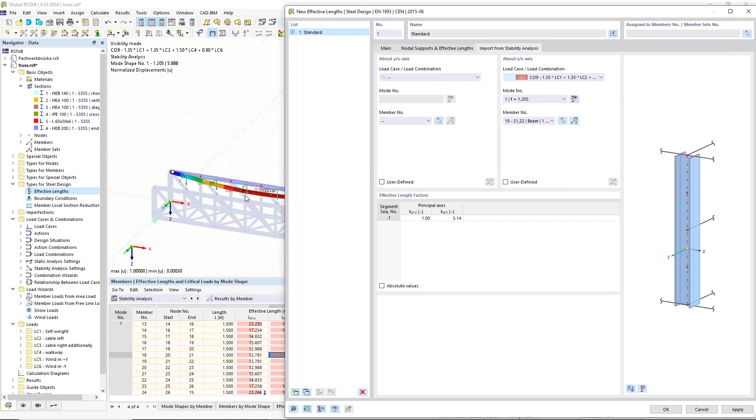I go into this tab, import from stability analysis, and for my top chord members I want to import from combination number 9 and the first mode shape, the one we see here, from the member with the highest compression force. This gives me the effective length factors automatically inserted for the direction around the z-axis, and for the other direction I have 1.0 as the effective length factor.

Now I have to assign this to all my top chord members. I cancel the visibility mode and select all the top chord members here, and the buckling length imported from stability analysis will be assigned to all of them. I'll just turn off the display of the local axis system and the results.

That's the input of effective lengths for the top chord members, and I can do so for all the other members too. I create a new effective lengths object, now for the diagonals and verticals. Here I can go directly into the nodal supports and effective lengths tabs because I don't want to import from stability analysis - here the effective length factors can be set directly.

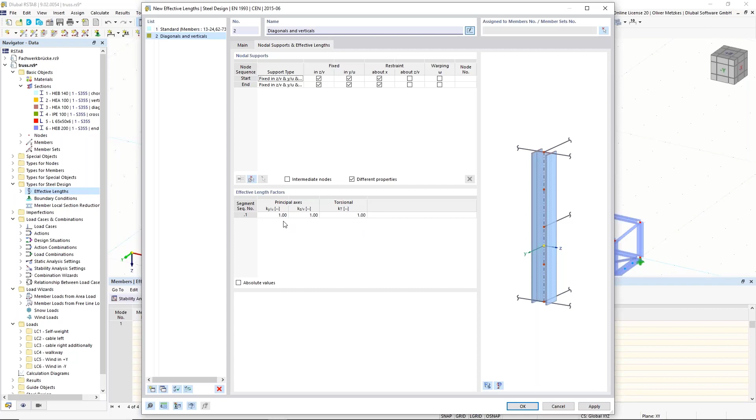I want to use 1.0 in the direction out of the truss plane, and I could use, for example, 0.9 for buckling in the plane of the truss. So I can set these factors directly.

Those settings by nodal supports are used for lateral torsional buckling. If, for example, I have intermediate nodes, I can create a segmentation and set lateral supports. In my case I just assume start and end fixed, also with torsional restraint. This default setting is okay, and I assign it to all my vertical and diagonal members - not to the frame members, because we can think of those in more detail.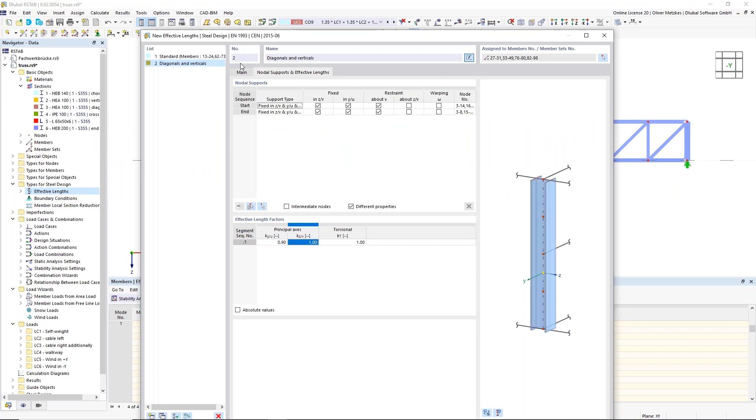For the frame members we could also set this effective length, but it's more complicated for buckling in the plane of the frame, because the frames could have buckling factors of, say, 3 or 4, and we don't have lateral restraint at the top since this frame is basically the lateral restraint of the whole structure. So I would not set a lateral support here at the top.

We could also calculate this effective length factor using stability analysis. If we did, we'd find critical load factors around 40. So if I performed stability analysis and looked at mode shapes where the frames buckle in frame directions, it would be higher than 40, meaning flexural buckling about the strong axis is not relevant here. So I just skip calculating the critical load factor and effective length factor, since it's not relevant.

I can also directly deactivate it here in the effective length setting. For the others I could use a factor of 1.0 for weak axis bending. And for lateral torsional buckling, I want to assume that at the top I don't have a torsional restraint, so I say it's only at the start of the member, not at the member end. You'll see it's not governing for these end frames since they aren't heavily loaded, but this just shows the input options we have here.

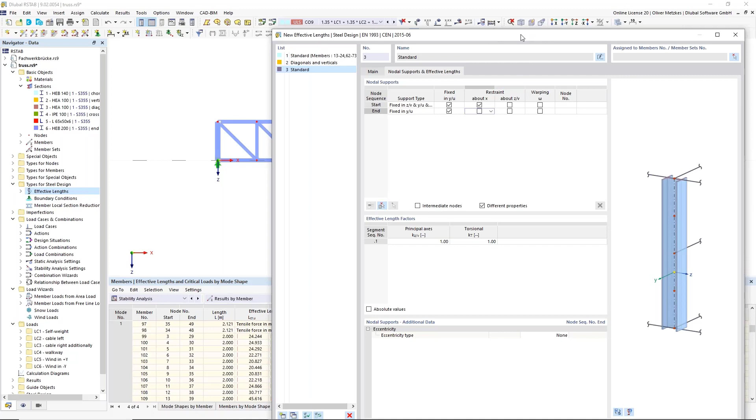Now I have to assign it also to the frame members. So the input of the effective length is now done.

We also have these cross beams here, which mainly have a bending moment, so we need to check lateral torsional buckling. We could also do it using effective lengths and then setting up the nodal supports - that would also be possible. So effective lengths always means we use the equivalent member method.

We also have another method implemented, the general method, which is defined by using boundary conditions. So if you want to use the equivalent member method, you set up effective lengths; if you want to use the general method, then you use boundary conditions.

So I just want to show how that works. I create a new boundary condition, and basically it's done by nodal supports. So we have this tab of nodal supports, and there we set up the boundary conditions that are then used in the eigenvalue solver. So we use an eigenvalue solver using the beam with the nodal supports that we put in here and the internal force from the main analysis.

In my case, for the cross beams, I want to say I have the forked support at the beginning and at the end, so already this default setting is okay for me. I don't have any intermediate lateral restraints, so I don't need intermediate nodes or something. I can simply use this default setting here.

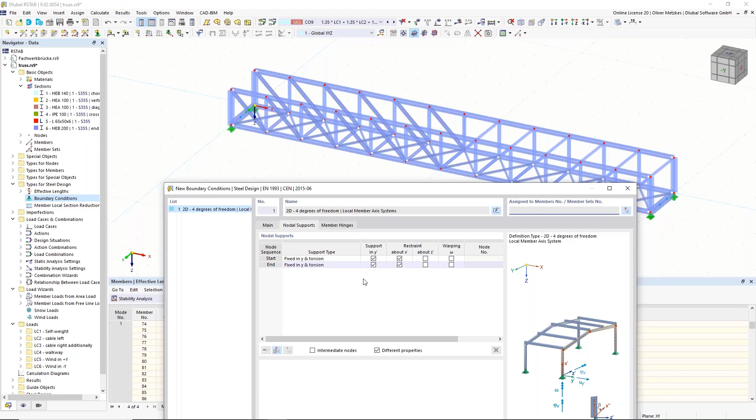Now I need to assign it to all my cross beams, and for that I use a filter function that we can find here in the display navigator. We use visibilities of members by sections, activated for the cross beams only, so then I can select them all, and I would also need it here for the end beams, so this one and that one. Okay, so now also the boundary conditions are set up.

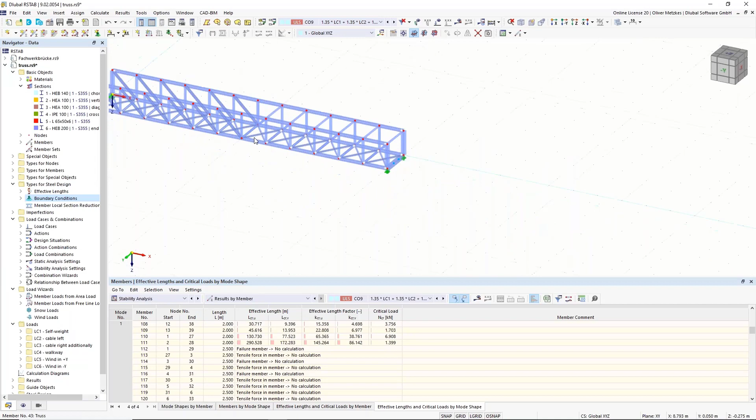So that would already be the input for my ULS design. I also have created a design situation for SLS design, and I can use the members for serviceability limit state. In my case, I don't want to check the deformation of all the members. It would only make sense to check the deformation at some places for the whole structure, so in this case it would be the vertical deflection of the whole bridge.

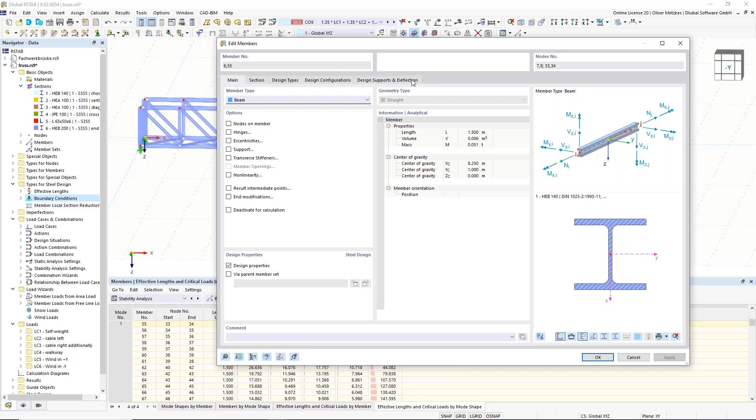So for that I could use a member set of the bottom chord, or I could use single members. If I use these two single members, for example, and right click on them, we see that as I have activated steel design, all the members that are designed have this option for design supports and deflection. There we can say the direction that should be checked, and also the length taken as reference length. As I want to check that this member is equivalent to the whole structure, I can activate the user defined length and define it with 18 meters.

In this case, it's already recognized as the whole length, so that would be okay. So if I define, for example, that I want to check a limit of L to 200, then it would take the 18 meters as reference length. These limit values are defined in the design configurations of the serviceability.

So we have here the serviceability design configurations, and if I click on that we see we can enter the deflection limits here. For example, if I want to check L per 200, I can input it here, and then this limit is set, taking the reference length of this design support and deflection tab.

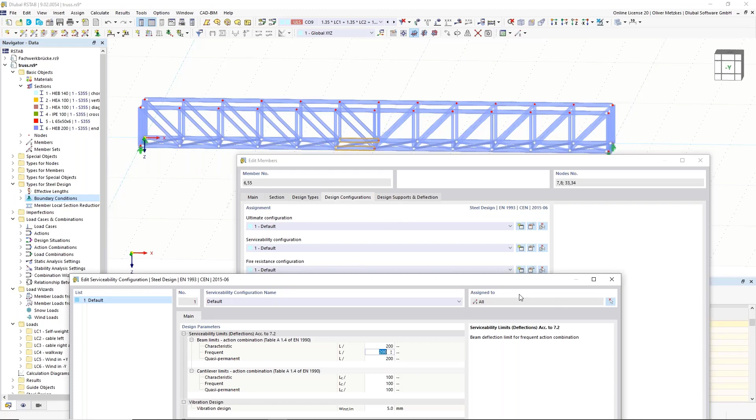Now I have said I don't want to check all the members for serviceability, but only those two. So I can also assign this serviceability configuration not to all the members, but only to those two members. Oh, that's wrong, I want to have this one and that one. Okay, and confirm it.

Confirm it again here. Now I see that, for example, this member in the design configurations tab doesn't have a serviceability configuration assigned. All the objects that don't have configurations for a certain limit state will not be checked in that limit state. So a member without a serviceability configuration will not be checked in serviceability limit state because there's no configuration assigned. So also, for example, in ultimate limit state, if you don't want to check this member, you can simply unassign the configuration.

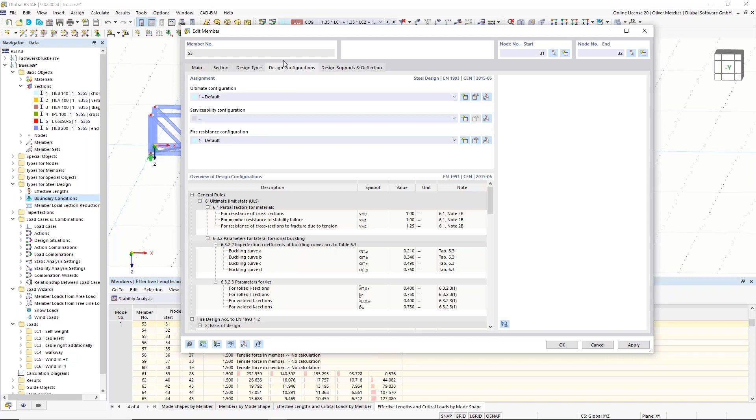But by default, configurations are always assigned, so there's no member that you can forget because they will have configurations by default also. Okay, so now only one thing left, so we can calculate the steel design.

So we go into the table for the steel design. We have here our input data. You see objects to design, materials, sections, so everything like we have specified before, also ultimate configurations and serviceability configurations.

And for the ultimate configurations, we can have a look at them. If you double click on this line, we see that we have chosen here to perform the stability design, so we will take into account effective lengths and boundary conditions that we have set up for all the members. If we don't want to perform stability design, let's say in our example for the bottom chords, we know they have only tension force, so we don't need stability design.

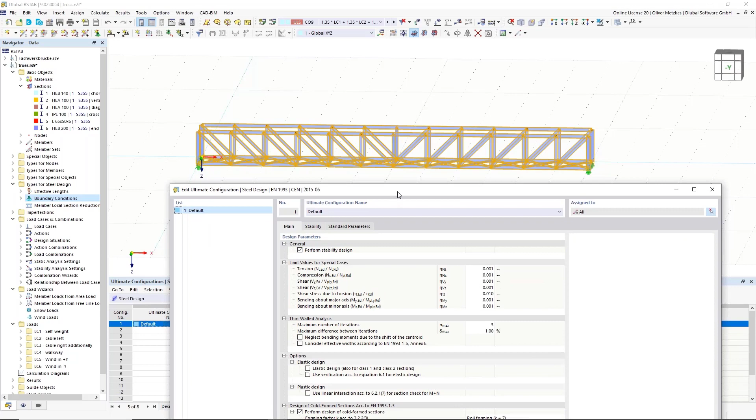We could also assign another ultimate configuration. Let's create another one and uncheck perform stability design. Now we can select all the bottom chords by filtering with visibility, and assign this ultimate configuration to all the bottom chord members. We won't check stability design here, since we have tension, it would be okay in this case.

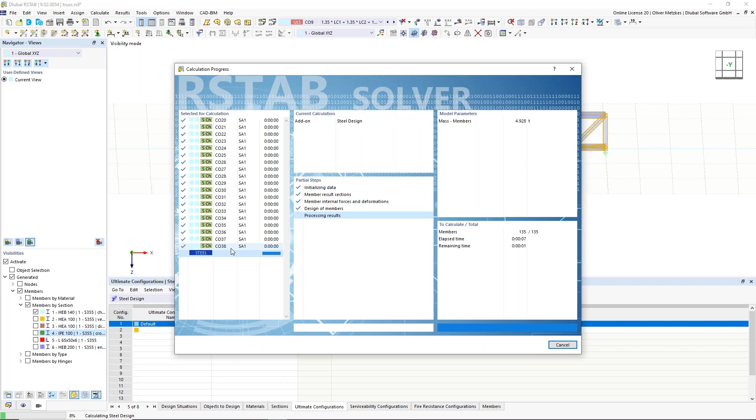Now we can calculate the steel design to see all the results. We already calculated the combinations from ultimate limit state, so now it will calculate serviceability limit state and then perform the steel design. We will have a look at the results and then we are finished here with the structure.

So now we get this result here. Basically we can show the envelope values and it will display a ratio for our members. The flexural buckling design check for the top chord would be at 1.03. I would say, well, that's quite okay in this case.

If we double click on this design check, in the overview we will see all the design checks that are over 1 or where there's a problem, non-designable or something. We will see it here and can directly click on it. If you double click on it, we see the design check with all its intermediate values, and for all the design checks, the formulas are also displayed.

The buckling design check is quite a big one with lots of intermediate values, and you see here all the values. As we can see, we wanted to specify the buckling length around the Z axis in a way that we get the critical load correctly also in the design check, so we used the 7.7 meters. It calculated the critical load of 190 kilonewton.

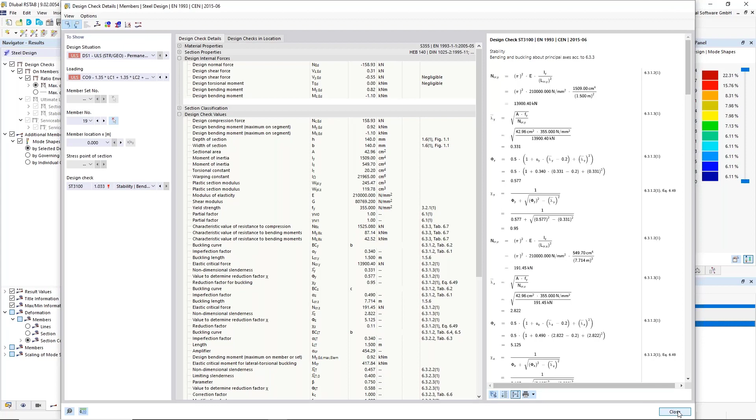If we check back in the stability analysis, we see in the member results for this member, it was the 190 kilonewton of critical load. So the result will match because we have used this effective length here.

Okay, so I think that was it for the structure. We have seen the modeling, we have seen the loading, we have explained the functionality of the structure stability add-on. We determined the buckling length of the top chord, and then we set up all the input for the steel design using effective lengths, boundary conditions, and now we have also seen the results. I think that was it from my side, and I will give it back to Andreas.